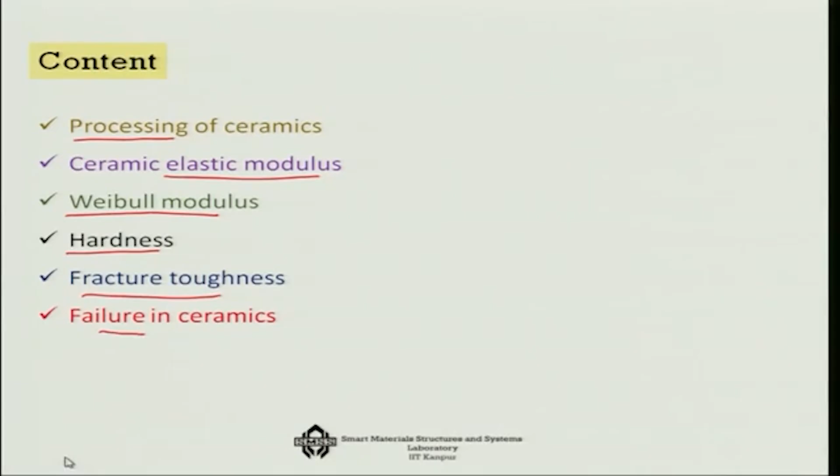Okay, we have discussed the basic introduction to ceramic materials in the last lecture. Today we will see some of the more advanced topics. For example, we will first talk about the processing of ceramics, then we will talk about the elastic modulus of ceramics, and more importantly for ceramics, because there is always a probability associated with ceramics, a kind of uncertainty about any value of the mechanical parameter. So, the concept of Weibull modulus, and then we have to talk about the hardness, fracture toughness and failures in ceramics. So, this is how we would like to cover more details related to ceramics.

Now, the first point is the processing of ceramics, because many of the properties of ceramics are actually dependent on the processing parameters and how this processing has undergone. So, unlike metals and glasses, which can be cast from the melt and subsequently rolled or pressed into shape, ceramics are generally made from powders, and there are two ways in which we can do it.

One is through a process of sintering, which we will talk about today, with pressure and heat, and another process which I will talk about later for piezoelectric ceramics, but not right now, is known as the sol-gel process. In the sol-gel process you do not need the application of heat, but right now the more traditional one is sintering, and that is what I will be discussing in this lecture. So, ceramic powder is consolidated and densified by sintering.

Now, what is sintering? This is a process whereby particles bond and merge under the influence of pressure and heat. So, high pressure and high temperature will lead to shrinkage and reduction in porosity as well. This is what we have tried to show you here: these are the powder particles to begin with, then you apply high temperature and pressure, and there will be some pores and the particles are going to merge.

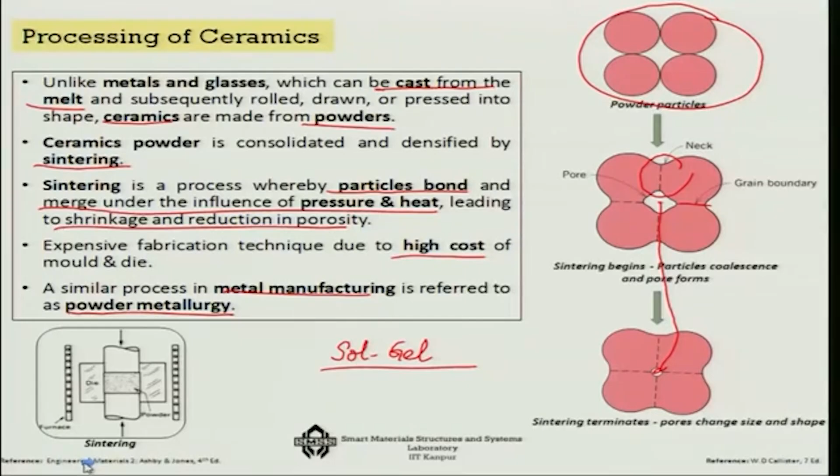Okay, so this is how ceramics are processed, and we are showing here that in this process of making the ceramics itself, pores are inevitable. So, what is the influence of the porosity? There will always be some pores or void spaces between the powder particles even after sintering and subsequent heat treatment. Pores are unavoidable. The porosity has some negative impact on the elastic properties and strength.

For example, look here: the modulus of elasticity of Al2O3 at room temperature is continuously coming down as the porosity increases. Similarly, as the volume fraction porosity increases, the strength comes down. One interesting thing, you can see that unlike the modulus of elasticity, the strengths are not like a single plot, they are in a more distributed fashion. I will be talking later about how this distribution is probability related, and that is why there is a Weibull modulus related to the whole thing.

Now, the volume fraction of porosity plays a very important role, which is volume of pores over volume of the specimen. That is the volume fraction of porosity. So, the higher the volume fraction, the more degradation of the material properties you expect, particularly the strength of a system.

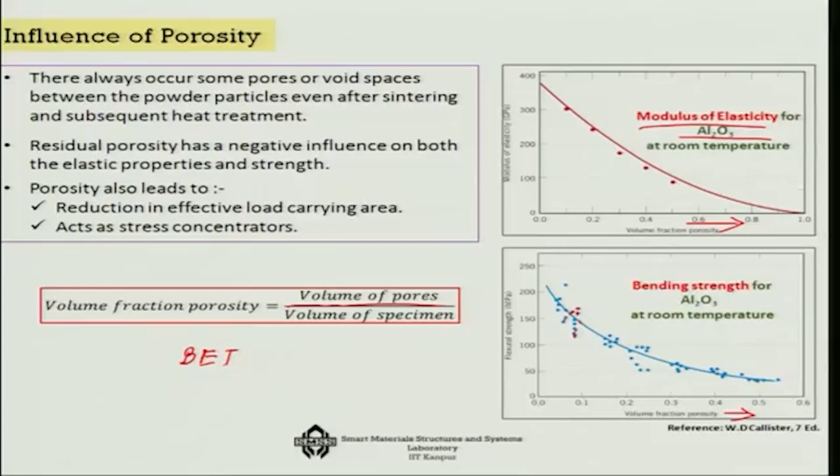And how do we measure the volume porosity? Well, there are several ways. One is called the BET technique, by which we subject these ceramic materials to adsorb gas, and then depending on how much gas is adsorbed, we find out the porosity of the particular ceramic sample.

Now, how do we measure the ceramic elastic modulus? It looks like a very trivial question, but it is not trivial at all. Why? Because when you have to make a sample for elastic modulus determination, say for example, this is a steel sample, you have to make a certain necking arrangement. Okay. So, this is a dog bone shape of the sample.

So, you have to make this dog bone shape, and this kind of a dog bone shape is very difficult to make, with these neckings etc., for the ceramic sample. So, sample preparation is the first important problem. The second problem is that in tensile testing we put these areas for gripping, but this gripping for ceramic material is enormously difficult.

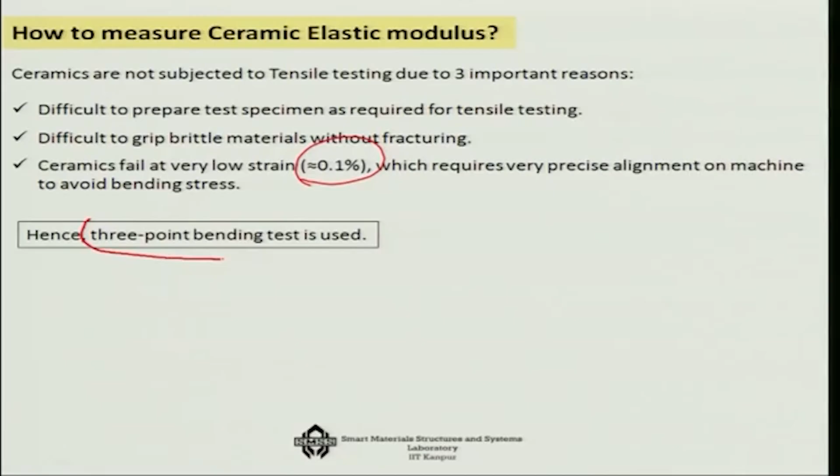And the other point is that ceramics actually fail at a very low strain, something like 0.1%. So, it is very difficult to align a machine and to avoid bending stress. Hence, for testing of ceramics, an indirect way known as 3-point bending is generally used. Let us see what this 3-point bending test is.

As the name suggests, this is a ceramic sample, as we can see here, and it has 2 supports, and exactly at the center a load is applied. So, it is 3-point bending that is happening, with 3-pointed supports. At the top surface of the specimen, this part is subjected to compression, and the bottom surface is subjected to tension.

Now, you can compute stress from the specimen thickness, bending moment, and area moment of inertia. So, if it is of length L, then L by 2 is exactly the midpoint, and the sample geometry, suppose B by D for rectangular cross section, or it can be circular cross section depending on what you wish to choose. If it is a rectangular cross section, then with this configuration and force F applied, the bending moment is FL by 4.

So, FL by 4 is the bending moment that this is subjected to, and if I know this bending moment M, and where exactly the particular fiber is located, for example the extreme fiber at distance y, then the stress is My by I. So, I can find out what stress it is subjected to.

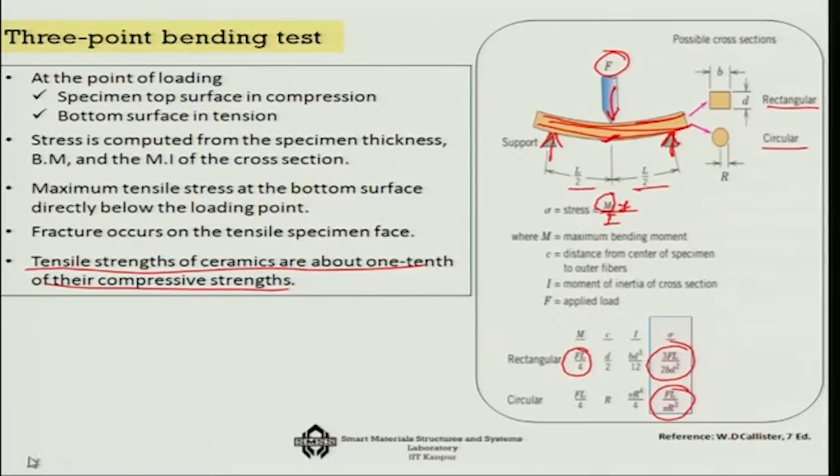Next, we can find out the stress, and if we use some displacement sensor, you can find the strain, and then plot the stress strain diagram. Unlike metallic samples, it is remarkably different here. You will generally find it to be a simple straight line, as you see here for aluminum oxide or glass, and a sharp point of failure. There is no plastic region observed, and this is the modulus of elasticity when you test them in tension.

And interestingly, if you test them in compression, you would see this kind of failure band happening. So, instead of a single direct failure like in tension, it happens stage by stage in compression. You can see this step by step failure in silicon carbide under compression, how with respect to time this kind of failure is happening.

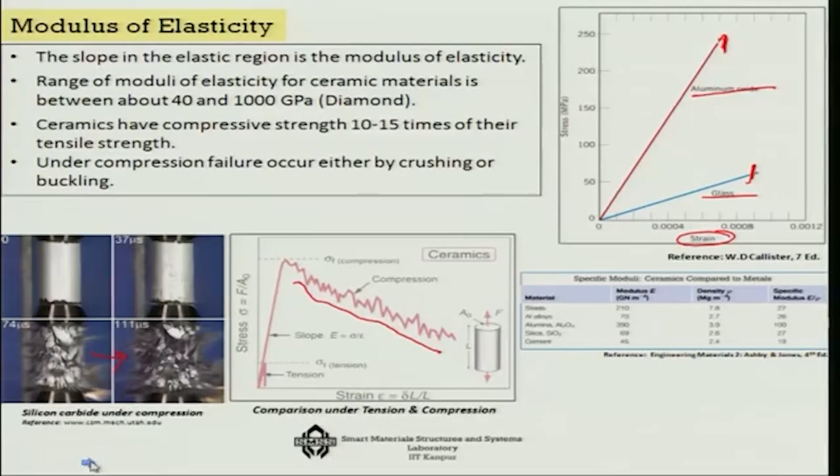The take home point is that the elastic modulus is generally quite high, but the failure strain is very low, and the strength is also not very high because of the presence of porosities. Not only is the strength not high, but it also varies a lot. We can easily demonstrate this if you take these chalk samples and try to break them: see the load you apply for one chalk sample, and how the samples have broken, much unlike ductile failure samples.

So, you can consider these with respect to the ductile failures that are happening in the metallic sample. So, you can see that, much unlike the ductile failure, the brittle failure is much different. There is no necking, it just falls apart, and not only that, the stress at which it falls apart, if I take another chalk sample, you may actually get more resistance to failure. So, it varies from sample to sample. That is the point I wanted to stress on.

Now, because of this variation, you need to know something called Weibull modulus, because there is a statistical way of representing the properties. So, what you have to know in this case is that because there is a distribution of the physical flaws, you have to have a mapping of the probability of failure of a component at varying stresses. So, you have to know that probability of failure, and from that you have to obtain the Weibull modulus of a sample. So, how do I know the probability of failure?

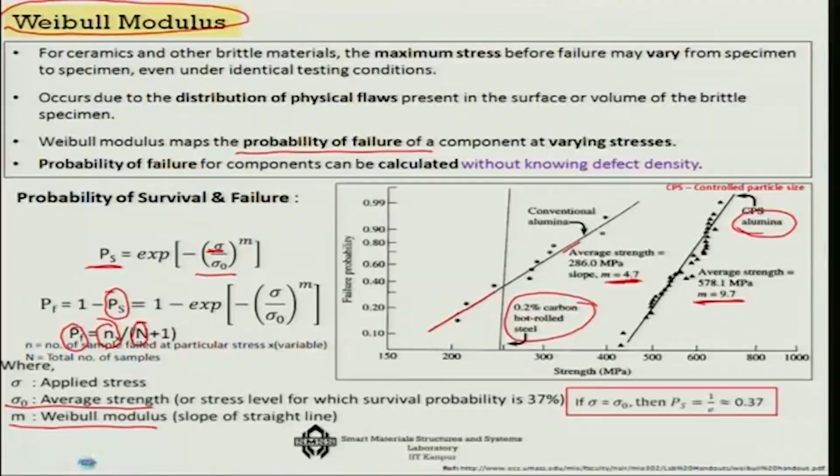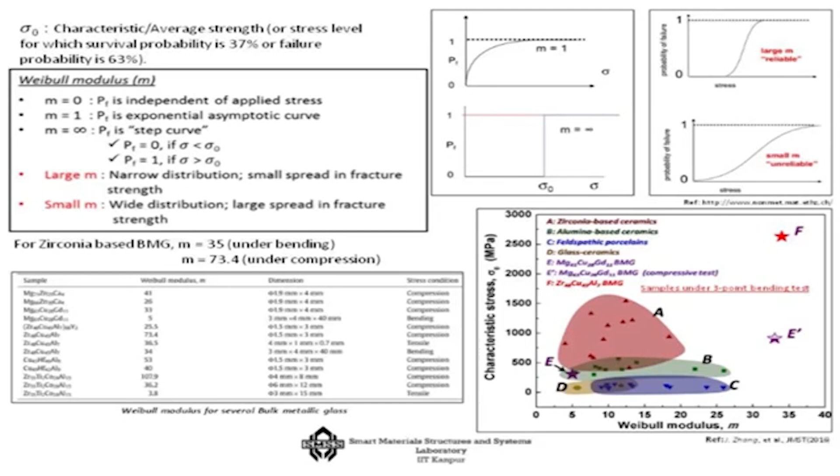Okay. So, these are like bulk metallic glasses, and then somewhere around here you can see these are zirconia-based ceramics, alumina-based ceramics, or feldspathic porcelains. And when you talk about usual glass ceramics, you are somewhere with a very low Weibull modulus. So, that is how the Weibull modulus varies for various ceramic materials.

Now, we talk about some of the other properties like the hardness, which is very important, because I told you earlier that one of the good applications of ceramics is in shaping or grinding or giving a smooth texture to metallic tools, etc. So, ceramics are hard and brittle due to the presence of ionic and covalent bonds, which have much higher bond energy in comparison to weak bonds like hydrogen bonds. And this property is utilized when we are making abrasive or grinding action.

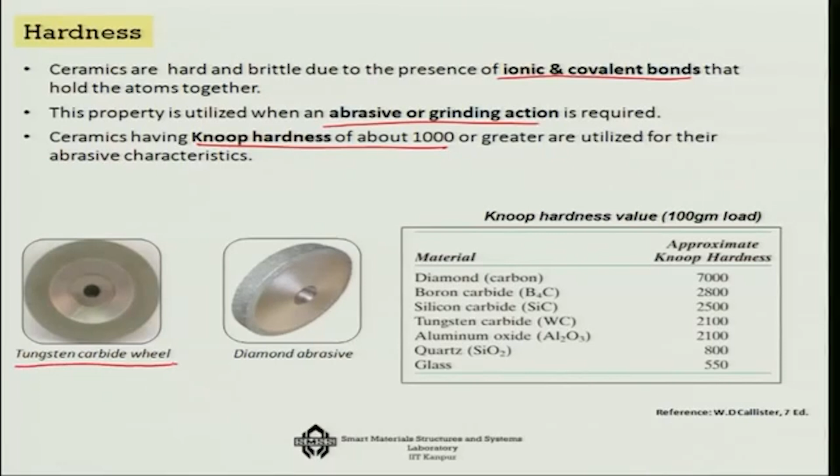Ceramics having Knoop hardness of about 1000 or greater are generally utilized for their abrasive characteristics. Suppose this one is a tungsten carbide wheel or diamond abrasives; these are generally used for sharpening metals. And their Knoop hardness: diamond is about 7000, boron carbide 2800, and anything greater than 1000, that means up to alumina, you can use for abrasive or grinding purposes.

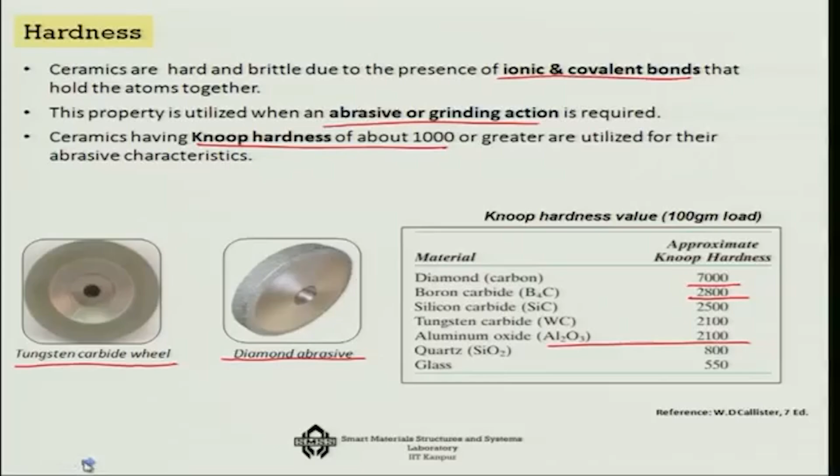The next important thing in ceramics is fracture toughness. Ceramics, being highly brittle, have low fracture toughness. Fracture toughness is a material property describing the ability to resist crack propagation, and also the energy required to grow a thin crack before failure occurs. Its unit is megapascal times square root of meter.

Now, low fracture toughness means brittle failure, just like I showed you earlier with the chalk samples, and high fracture toughness means ductile failure, as I showed you with the mild steel samples. Fracture toughness is defined as the product of these three, where Y is a dimensionless parameter, sigma c is the critical stress needed for crack propagation, and a is the crack length.

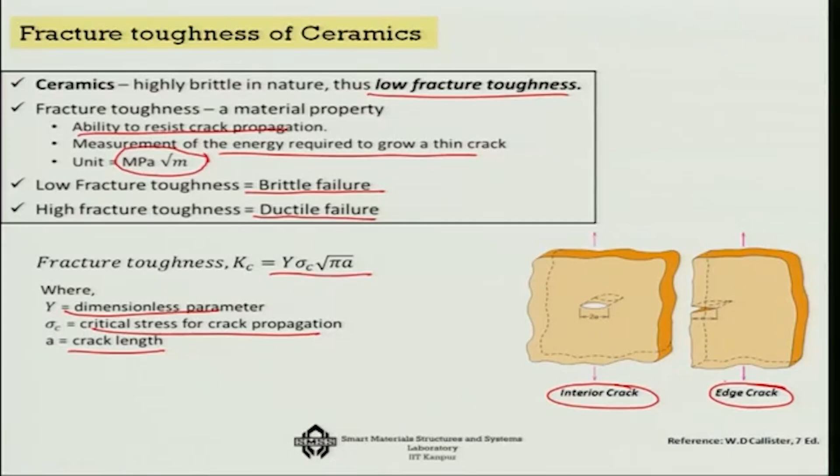And among the metals there are variations, like mild steel has a higher fracture toughness than aluminum alloys. Among the polymers, even though they can sustain much higher strain, their modulus of elasticity and yield strength are low, so you will not get fracture toughness beyond a certain value. And with composites, you get a kind of mixing of these possibilities.

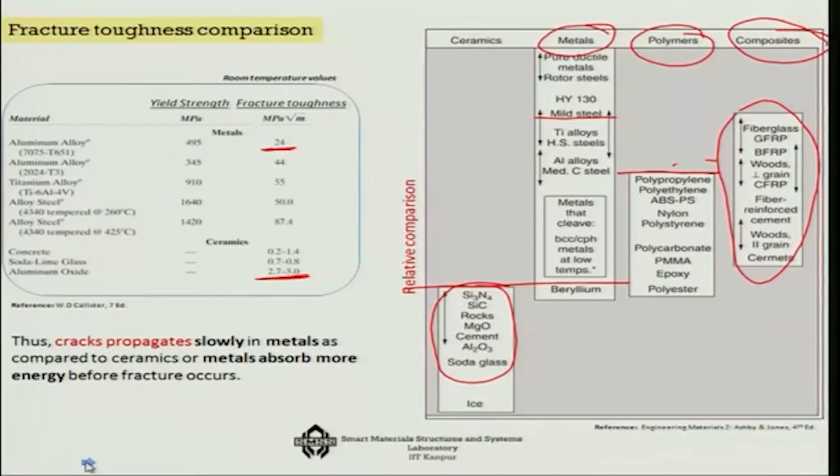You can have metal-ceramic composites, where the metal has high fracture toughness and the ceramic brings it down a little, and ceramic-polymer composites, where the polymer has slightly higher fracture toughness and the ceramic brings it down, so you get an average value for the composites. So, that is the fracture toughness comparison of various types of material. This is particularly important whenever we consider the reliability of a product.

Now, failures in ceramics have certain telltale signs. One is negligible plastic deformation, meaning it will give almost no warning. In fact, you hear about bridges collapsing quite often. Many of these bridges are made of concrete, and concrete predominantly contains ceramic materials.

Also it is having some reinforcements like mild steels. But if this reinforcement is below a particular level, below a critical level, then the failure gets governed by the ceramics. So it is a ceramics governed failure that comes into picture if the reinforcement is given below a particular level due to poor quality maintenance, corrosion, etc. Now, if that happens, then this kind of structures will be susceptible to sudden failures.

You will see bridges collapsing suddenly. Why? Because the steel that is supposed to be going there is not given, or it got corroded or something, and hence it is no longer a metallic driven failure where you will get a warning for quite some time because it does not fall all of a sudden. On the other hand, if it is a ceramic governed failure, it will be a brittle fracture and it will happen all of a sudden. So, this is something that we see many a times.

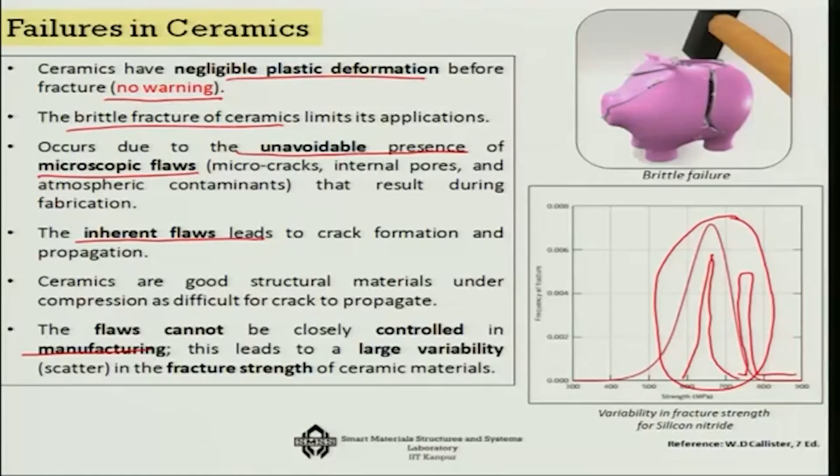And this occurs due to the unavoidable presence of microscopic flaws or micro cracks in the ceramics, and these cracks are unavoidable because these are the inherent flaws that are there in the systems. So, in order to have a ceramic with a high strength, you need to control these flaws during the manufacturing, and if you cannot control it, what you will get is this kind of a strength variation. This will become sharper and sharper as you can control it more and more. In fact, for metals you will get almost what we call a crisp probability, a straight line scenario. That is why the manufacturing process is so important in ceramics.

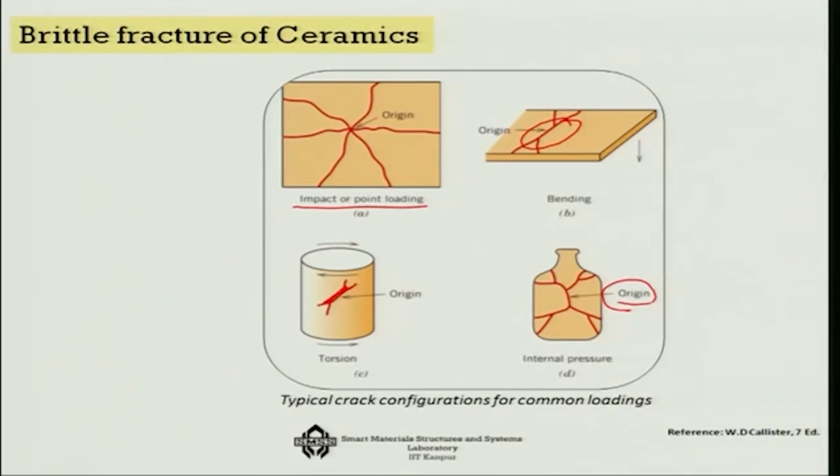Now, these are some pictures that show various types of brittle fractures in ceramics. If you had an impact or point loading on a ceramic tile, you will see this is the way the cracks are propagating, or if it is bending, this is the way the cracks are propagating. If it is torsion, you will see it at a 45-degree angle, which you will see in any strength of materials, because that is the principal plane where the failure is occurring in tension. And if it is due to internal pressure, you would see this type of failure. So, by looking at the crack, you can get an idea of whether it happened due to impact, bending, torsion, or internal pressure. So, for prognosis, that is very important.

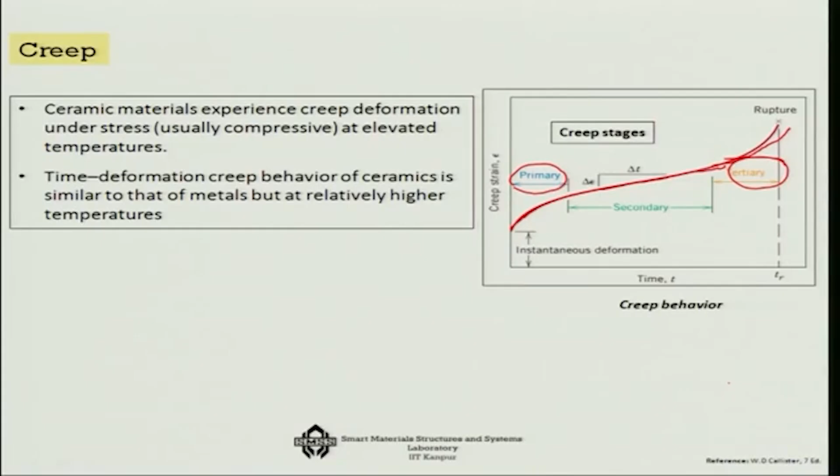The next important thing is creep, because ceramic materials do experience a lot of creep under stress and at elevated temperature. If you look at this creep, there are actually three parts of it. First is the primary creep, where the creep strain is increasing with respect to time. Then it gets stabilized, that is the secondary part, and once again it increases at a sharper rate in the tertiary region. So, as time continues, this happens at a sharper rate towards the end. That is the nature of creep in ceramic materials.

Now, how do we make ceramics conductive, because ceramics are generally insulating in nature. There are two ways in which we can make ceramics electrically conductive. One is that you raise the temperature, because at sufficiently high temperature point defects such as oxygen vacancies can arise, and this will lead to ionic conductivity. That is something that happens in zirconia. The other is to introduce transition metal elements such as iron, copper, manganese or cobalt, or lanthanide elements such as cerium, or actinide elements such as uranium. This can produce a special electronic state in which the mobile electrons or electron holes increase.

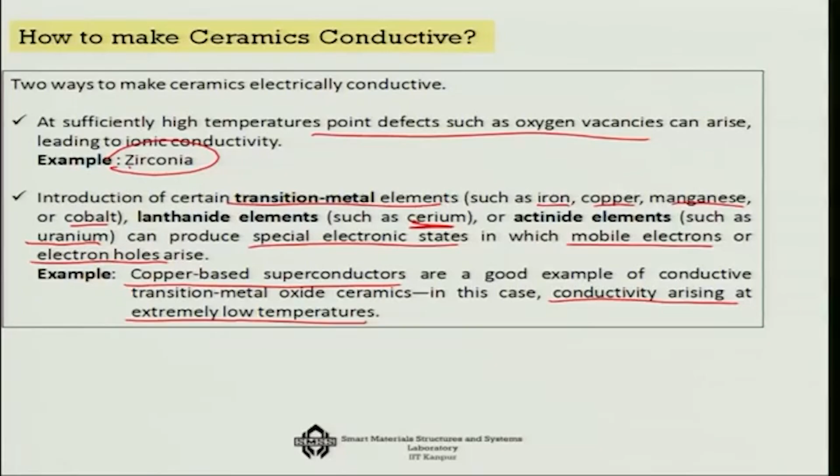Copper based superconductors are one of the best examples. Ceramics in general are not conductive, they are highly insulating, but superconductors are made by using ceramics along with one of these transition metals to increase the conductivity. Interestingly, this conductivity arises at extremely low temperature. So, on the one hand we have high temperature raised conductivity in zirconia, and on the other hand extremely low temperature superconductivity, where you add transition metal elements to introduce conductivity into the ceramics. Of course, you can make ceramic composites to do a similar thing.

So, this is where we will come to an end in this lecture. We have discussed metals and ceramics, so in the next lecture it is time to discuss polymers and the classification of polymers.